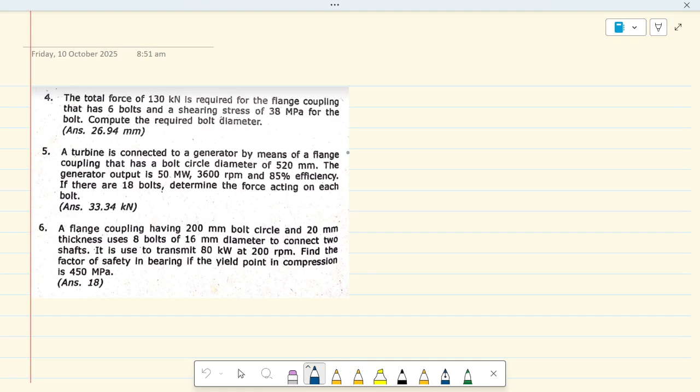So for number 4, the total force of 130 kilonewton is required for the flange coupling that has 6 bolts and shearing stress of 38 MPa. Compute the required bolt diameter. Basic to. Basic yan.

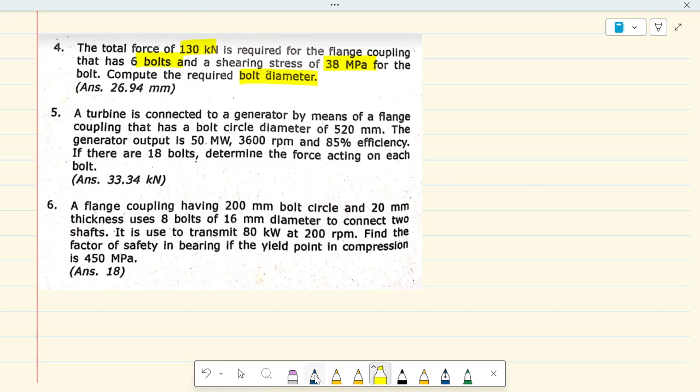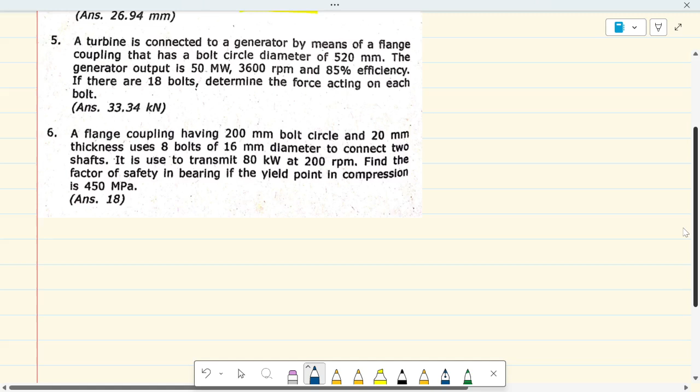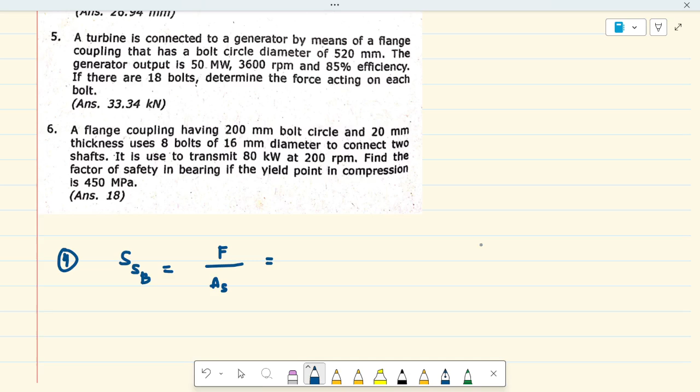So, binigyan ka agad ng bolt diameter. Wala kang bolt circle dito. You don't need to kasi binigyan ka lang ng force. So for number 4, SS nung iyong bolt, key tuloy nilagay ko. Force over area ng shear. Okay? So binigyan ka dito ng force total.

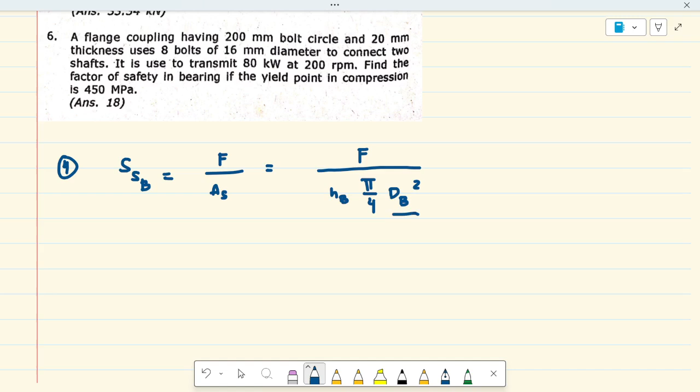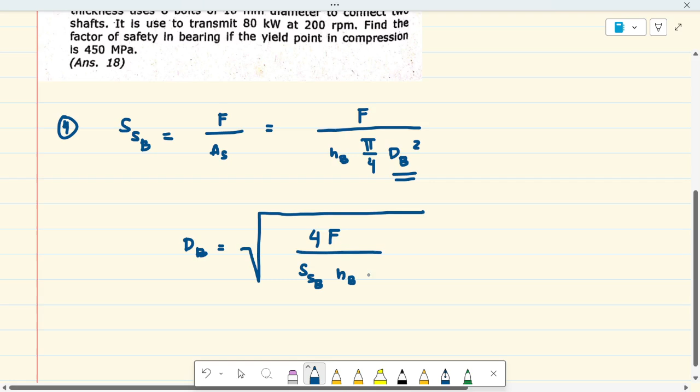So force over number of bolts times pi over 4 diameter ng bolt squared. Ang hinahanap ay yung diameter ng bolt. Okay? So diameter of the bolt is equal to square root ng 4F over shearing stress on the bolt, number of the bolts, and then pi. So, solve diameter of the bolt.

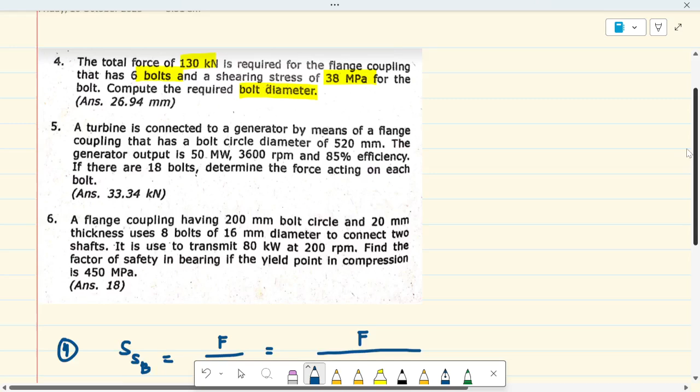4 times the force. Ano ba yung force natin dyan? The force is 130 kilonewtons. Gawin natin 130,000 newtons. Okay? The shearing stress on the bolt, ang binigay dyan ay 38 MPa. 38 Newton per millimeter squared. The number of bolts ay 6. And then pi. So, cancel all same units, Newton, Newton.

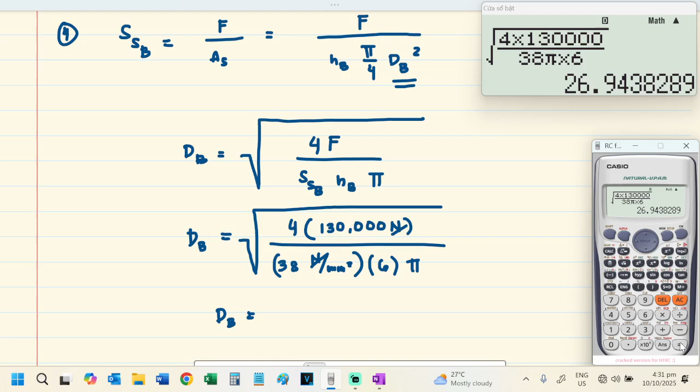Diameter of your bolt is, solve natin, 4 times 130,000. So, 38 pi times 6. So, 26.94 basic yan. mm.

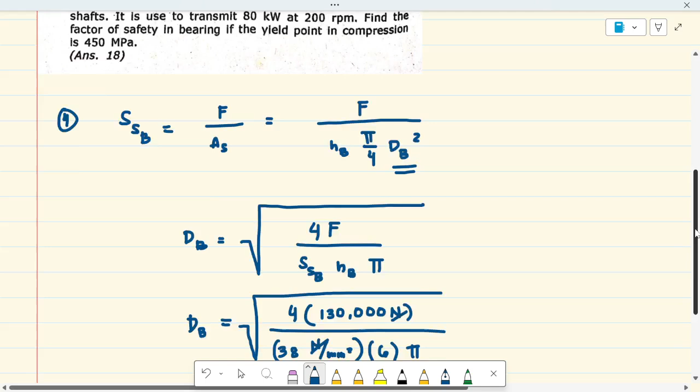Next problem. A turbine is connected to a generator by means of a flange coupling that has a bolt circle diameter of 520 mm. The generator output is 50 megawatts and 3,600 RPM yung kanyang spinning rotational speed. And then efficiency niya is 85. So ibig sabihin, ang kukunin mo dun yung sa motor.

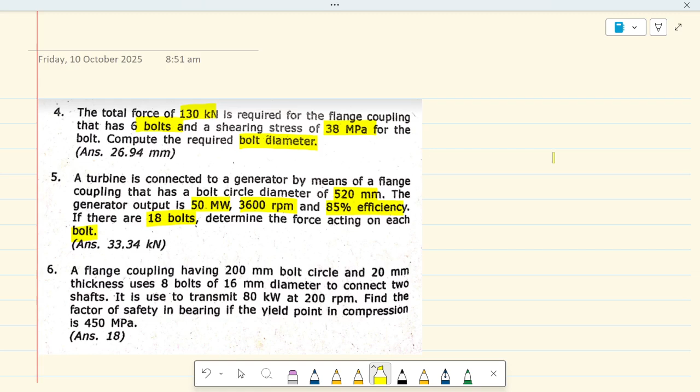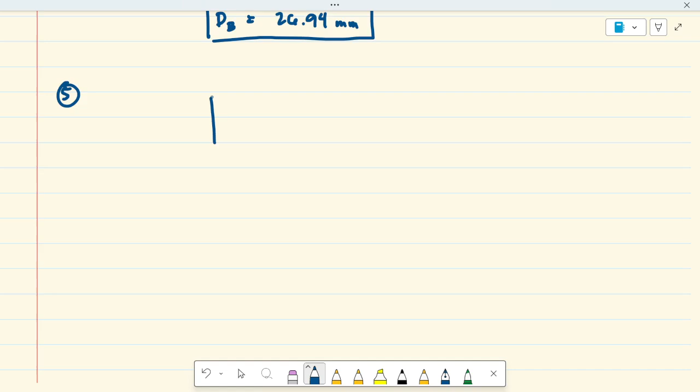Okay? If there are 18 bolts, determine the force acting on each bolt. Okay. Generator output to. Ang nagtatransmit ng power dyan ay yung motor. Drawing natin yung diagram. Okay? So, for number 5, so ito yung motor mo. This is the motor. Okay? Tapos, meron ka ditong coupling.

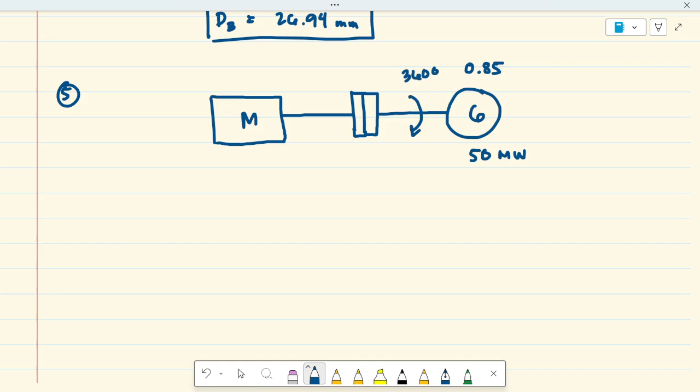Okay? Coupled siya to a generator. So, the efficiency is 85%, 0.85. Tapos, output niya is 50 megawatts. Okay? And turning ng 3,600 RPM. You want to know the motor power? That is equal to the generator power over efficiency. Ganun yun.

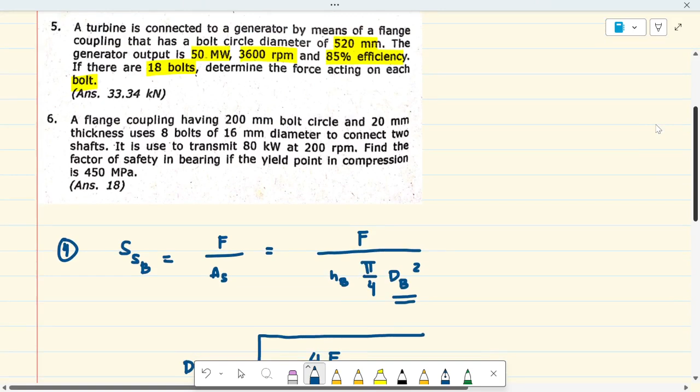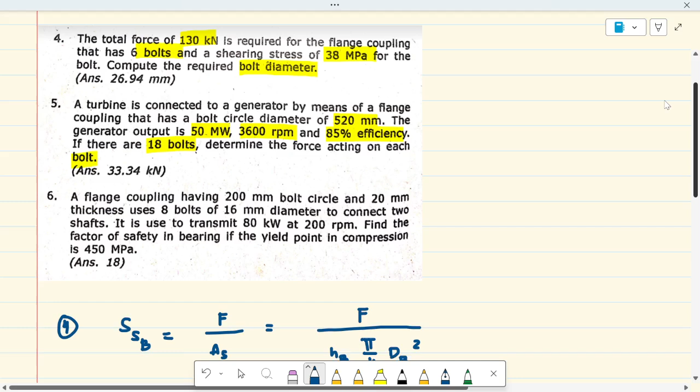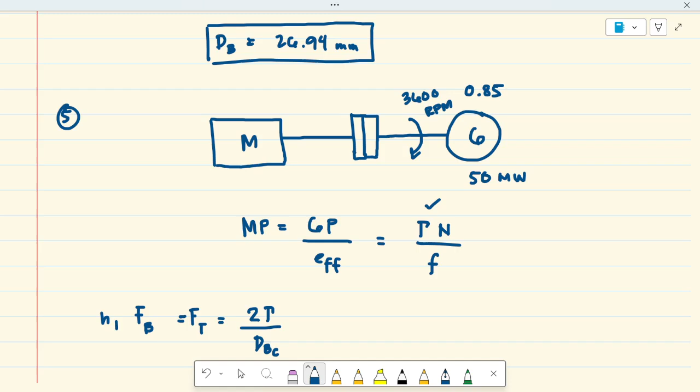So, this is force on each bolt times number of bolts. Ang hinahanap natin ito. Now, yung force on each bolt is equal to number of bolts. So, twice of the torque, number of bolts, tapos diameter ng bolt circle. Ano yung torque natin? Saan natin makuha dito? Di ba? This is okay, T, tapos generator power times yung iyong factor divide by efficiency times N.

Oh, sorry. This is torque. Wala na tong torque. Okay? This is dapat equal sa torque. Yan. Ganyan dapat. Okay? So, pasok natin siya dito. So, twice nung generator power times the factor over efficiency and then N. Divide by number of bolts, diameter ng bolt circle. So, makukuha natin yung force on each bolt.

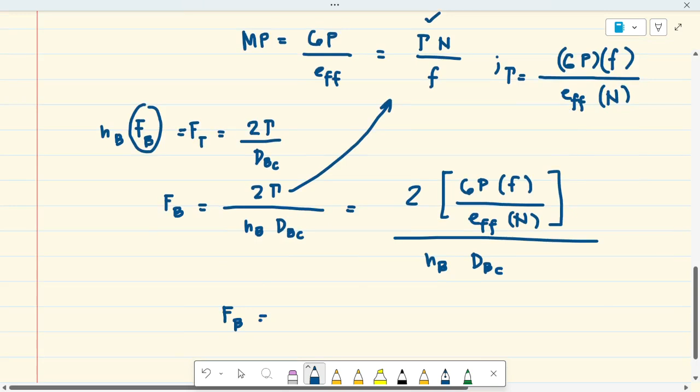So, the force on each bolt is equal to 2. Yung generator power natin is 50 megawatts. Okay? Times mo na lang ng 1,000. So, 50 times 1,000 para maging kilowatts. The factor is 9549000 Newton, millimeter, RPM, per kilowatt. Divide by, efficiency natin, 0.85. Number of bolts ay 18 bolts.

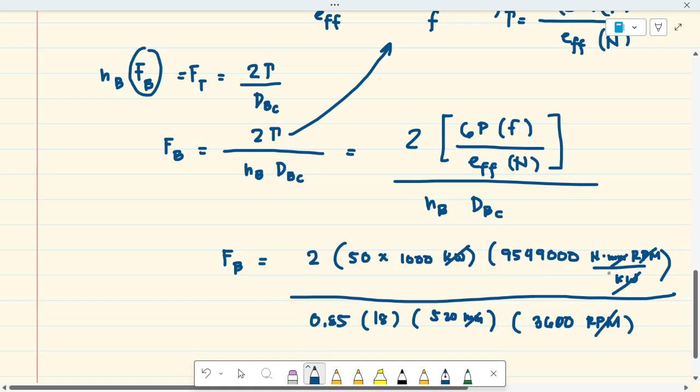Diameter ng bolt circle ay 520 mm. And then ang RPM natin ay 3,600. Cancel all same units. RPM, kilowatt, mm. Newton to. Ang kailangan ko ay kilonewton. So, 1,000 Newton per kilonewton. So, cancel all same units will arrive with what value? So, the force on each bolt ay

ayan. So, 50 times 2 times 1,000 times 9549000. Okay? 0.85 times 18 times 520 times 1,000 times 3,600. So, the answer is 33.34. Basic. Kilonewtons.

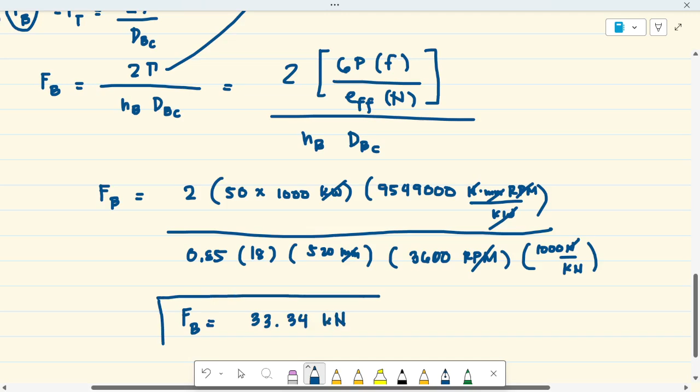Yung madali lang ang couplings. So, last problem.

Okay. So, a flange coupling having 200 mm bolt circle and 20 mm thickness uses 8 bolts of 16 mm diameter to connect two shafts. It is used to transmit 80 kilowatts at 200 RPM. Find the factor of safety in bearing if the yield point in compression is 450 MPa. Okay, no problem.

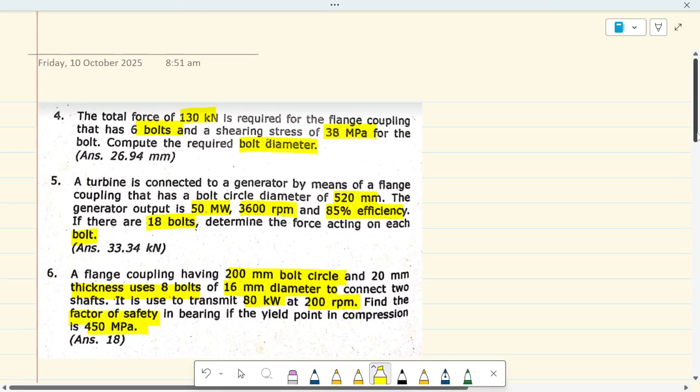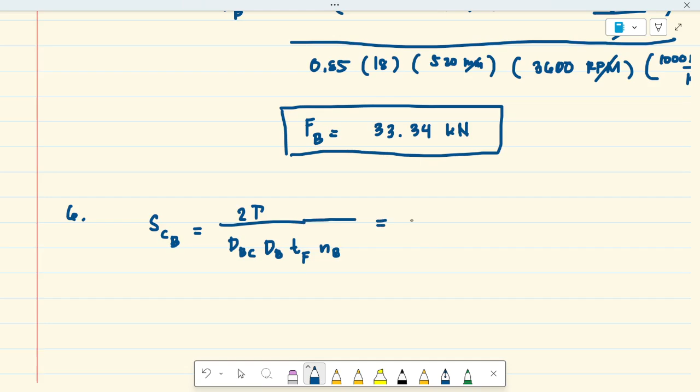So, yield point on number 6. Sabi dito, yung compressive on bolts, that is 2T over diameter ng bolt circle, diameter of the bolt, thickness of the flange, and then number of bolts. Okay? Pinapakuha kasi yung factor of safety. So, ang binigay sa'yo dito, yield point. Okay? Yield point in compression is 450.

So, this is 0.6 SY over factor of safety. Ang kukuhanin natin yung factor of safety. May torque bang binigay sa'yo dyan? Wala. Pero meron tayong power. Diba? Power is TN over factor. Pwede ko i-reform to na torque is equal to power times factor divide by N. Pasok ko na siya dito, okay lang?

So, in terms of factor of safety tayo. So, factor of safety is equal to 0.6 SY. Okay? Multiply to diameter ng bolt circle, diameter of the bolt, thickness of the flange, number of bolts. Divide by twice of the power factor divide by N. Pwede ko na kunin.

So, factor of safety is equal to 0.6. Ano yung yield point natin? 450 Newton per millimeter squared. Diameter of the bolt circle is 200 mm. Diameter of the bolt is 16 mm. Thickness of the flange is 20 mm. Number of bolts ay 8. Divide by,

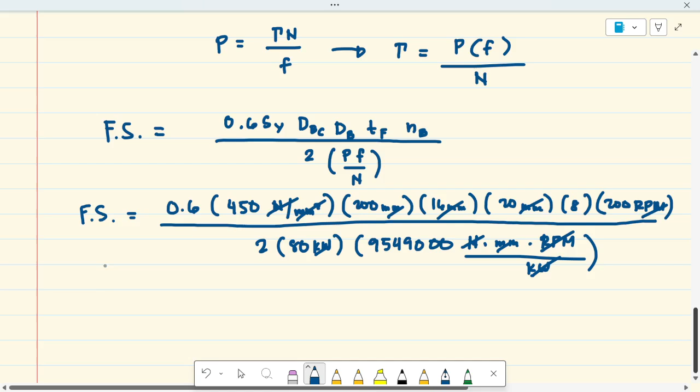okay, aakyat ko na lang yung N. Ilang RPM yan? 200 RPM. Tapos, twice of the power. Power is 80 kilowatts. Multiply to factor na 9549000 Newton, millimeter, RPM, per kilowatt. So, cancel all same units tayo. Dapat walang unit yan kasi factor of safety. So, Newton, millimeter squared, yung millimeter, RPM, kilowatt. So, non-unit na siya. Will arrive with factor of safety.

So, what is the factor of safety? So, 18 times. Okay. Ayan. So, 0.6 times 450 times 200 times 16 times 20 times 8 times 200. 2 times 80 times 9549000. So the answer is 18.1.